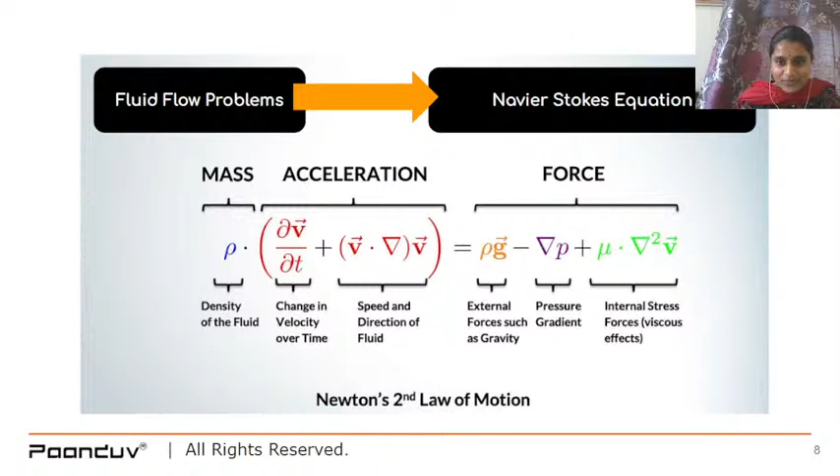Now, I am very sure that this equation is not new to you. Obviously, it's the Navier-Stokes equation. This equation was quite simple to solve until one day Mr. George Stokes decided to add the viscous effects term to it. And since then, this equation has become one of the unsolved math problems of the world.

The basis of CFD is rooted in the Navier-Stokes equation. The solution of this equation requires the simultaneous consideration of mass, momentum as well as energy. Such problems cannot be solved analytically, and that gave birth to computational fluid dynamics.

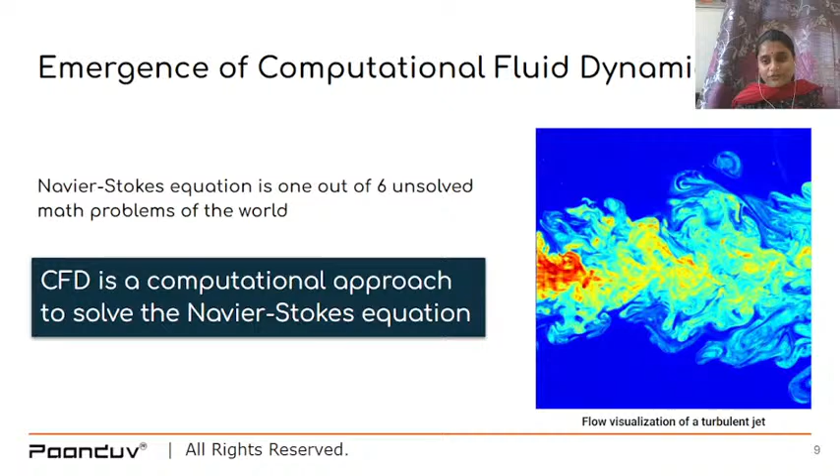Now, what do you imagine when I say CFD or computational fluid dynamics? Do you imagine some colorful images? What you imagine are some imaginary particles moving here and there with very colorful screens in front of you with red, black, white and different colors involved.

But CFD goes way beyond these images. What you see in front of you are not simple images, but these are actually the simulation of data centers which we have just discussed. The black buildings that you can see in front of you are actually massive data centers which we have simulated in our computers.

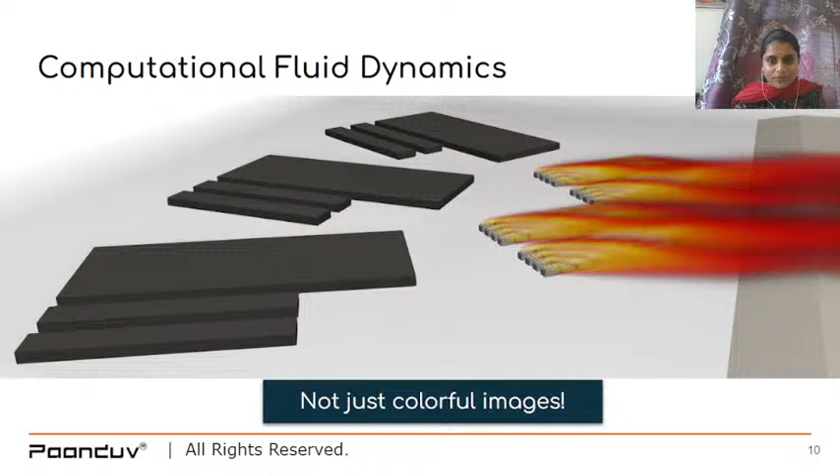So just imagine the capability of CFD and try to see it beyond just the colorful images. What goes beyond CFD is the mathematics, fluid mechanics, physics as well as the numerical analysis.

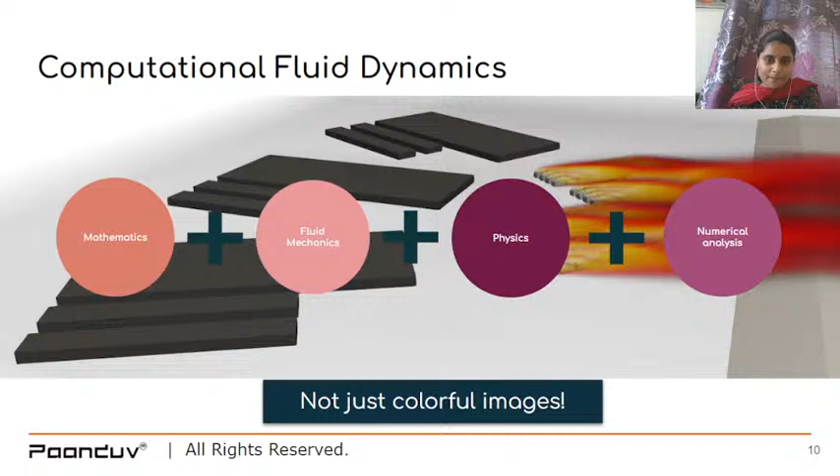Now, since I have given you a fair idea about CFD, let's see the flow of CFD. We can divide the flow of CFD into 3 parts: pre-processing, the solving stage, and then the post-processing stage. Now I'll discuss the pre-processing stage first.

It is the very first stage of CFD simulation which helps you define the parameters of simulation in an accurate way. So what you do is create a mathematical model, and we apply our boundary conditions as well as the different material properties according to our problem.

So to sum up what we do in the pre-processing stage: we upload our geometry, the CAD geometry, we create the simulation domain, we assign the simulation settings like initial and boundary conditions, material as well as physical phenomena, and then we generate the mesh.

So how do we do this? We do this with the help of FreeCAD as well as the Snappy Hex Mesh tool. This is a tool present in OpenFOAM that lets you mesh your geometry.

So at this stage you have to define what your problem is and what needs to be done. You have to apply everything that you need for the problem to be solved.

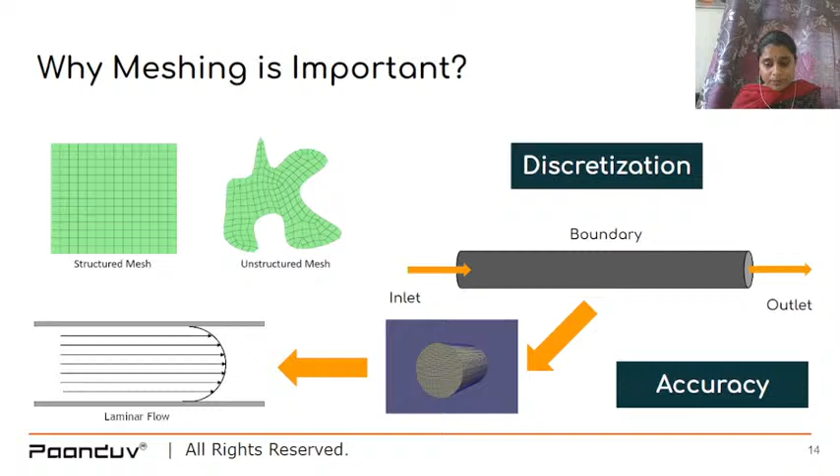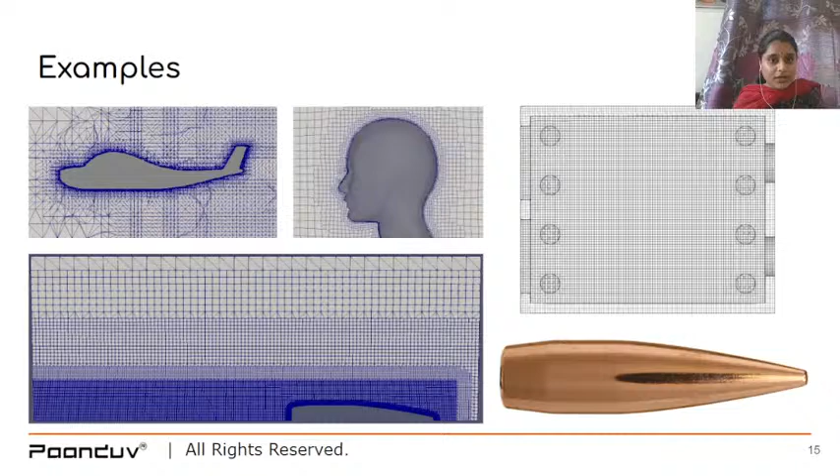Now since I am talking about CFD, you must be wondering how it is going to help us. Obviously the people who are joining us today might be from different backgrounds - these might be from mechanical, chemical, aerospace and all. So you might be wondering how, if we learn CFD, it is going to help us, and what advantages we can avail when we learn CFD and OpenFOAM.

Now if anyone joining us today is from Gujarat or has ever been to Gujarat, they might be aware that Adani has installed wind turbines there, and these wind turbines are even taller than the Statue of Unity. These wind turbines are presently generating 5.2 megawatts of electricity, and this electricity is helping to light up to 4,000 homes. So the nacelle that we have simulated is the heart of the wind turbine - it is where the kinetic energy is converted into mechanical energy that actually produces the electricity. Poonduv Applications has put together a case study of the thermal management of the nacelle, overcoming the geometric complexities.

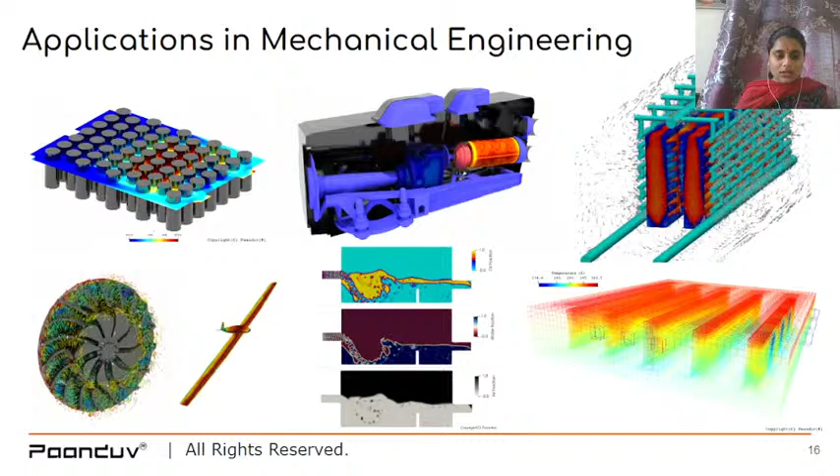Now let's look into the aspect of chemical engineering, how CFD plays an important role in it. Chemical engineering is a major user of CFD. Chemical processes are all about separation, boiling, condensation, and mixing with unit operations. There are large numbers of unit operations or separation technologies where we can use CFD to get better performance of our systems.

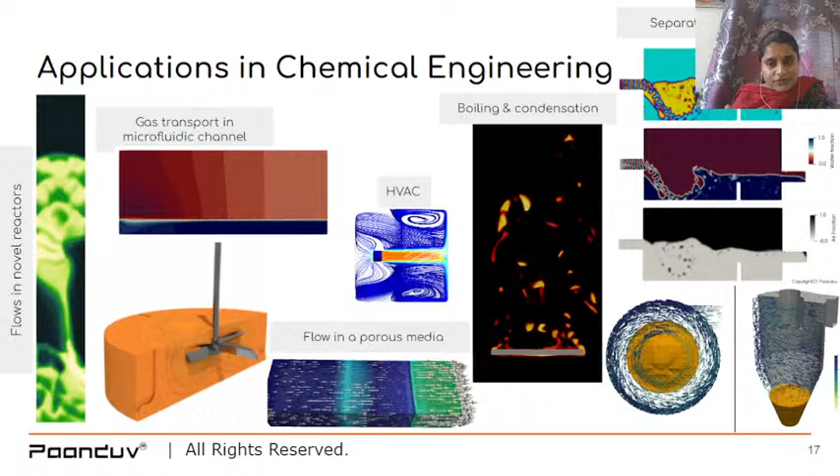Similarly, we can use the benefits of CFD in porous medium boiling and condensation processes, and also for the centrifugal separator, shown on the right, where solid particles are separated from the fluid, which can be a gas or a liquid. We can increase the efficiency of our cyclone, which is intensively used in industries nowadays. Through the use of CFD, we can increase its accuracy and overall efficiency by optimizing the design parameters as well as the velocity.

Now let's move on to the applications of aerospace engineering. It's said that traditionally aerospace engineering is the foremost user of CFD. Recently, the Russian military has said that they have used hypersonic ballistic missiles in the conflict with Ukraine.

So what are these supersonic missiles? These are missiles with a maneuverable warhead traveling at a very high speed, you can say supersonic speed. Through simulations, we try to simulate these supersonic ballistics.

You must also be aware of drones. They are on a boom everywhere. The drone market is expected to reach about 500 billion by 2028, and it is expected to cross a CAGR of 50% by that year. So where does the drone come into play? Drone performance depends upon many factors which require design simulation to evaluate behavior and performance under actual conditions. Through simulation, we can evaluate the flow, structure, and thermal management, as well as the thrust and lift calculations of the drone.

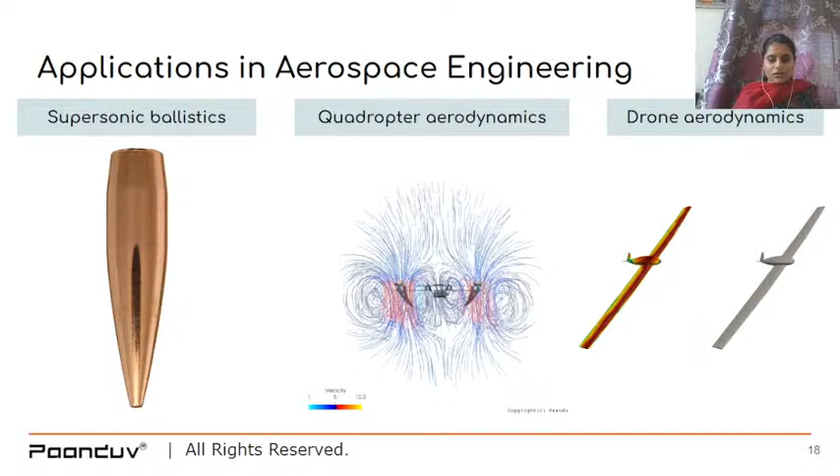Now we will look at the applications of CFD in civil engineering. Here we can use CFD for dam break analysis, tailings, multiple cascading drop shafts, biochemical reactions, and also wastewater treatment.

What is dam break? Routing is used to demonstrate how a reservoir will affect the volume of water downstream under conditions like flood or storm, so that we can reduce or avoid loss of property and human life. Paanduv Applications has modeled the tallest concrete gravity dam in the world, located in Arunachal Pradesh, and demonstrated how the reservoir will affect the volume of water downstream.

Now tailings are the mine waste which contain a lot of effluents and harmful products. We try to navigate the flow to places far from human civilizations. These tailings are non-homogeneous, so many researchers and scientists have suggested that if we dewater these tailings streams, we can produce a homogeneous and non-segregated thickened form. We work at this forefront to prevent catastrophic failure of the geological structure and propose a design to control the dam, reducing mishappenings so that the effect on nature and human life is minimized.

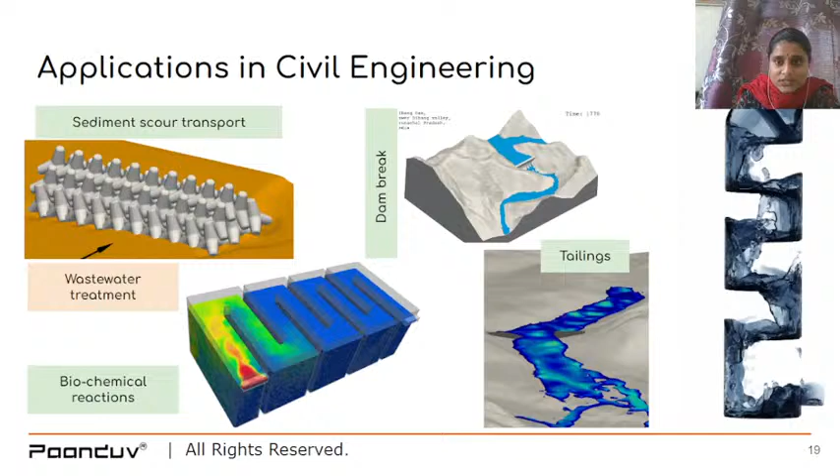Similarly, on the very right hand, you can see the multi-phase cascading drop shaft. The drop shafts are used to reduce the kinetic energy of water so that they can have minimal impact on the underneath structures. So what we do is we try to limit the drop height between the baffles to keep the velocities low. So these are some of the places where CFD is being used extensively by the industries to design the systems, to design new systems, and even to protect human life and civilizations.

Now this brings us to tell you about our module which we have included in our academic program. So PA3P, which is our academic program of Paanduv applications, we have divided our modules into different hours. We have 10 hours, 20 hours as well as 30 hours modules. You have the choice of selecting any of the modules according to your needs, but in each of the modules we try to cover all the aspects of the flow of CFD. We try to cover the pre-processing, the solving as well as the post-processing in all of these modules. It's just we dive deeper when you go for the 30 hours module, so we'll give you more insight into what goes beyond the solving.

So in a 10 hours module, we help you in installing the operating system. We give you details about the meshing, the structured, unstructured, graded as well as the mesh refinement. We have divided the 10 hours and 20 hours into different days. So every day we take a 4 to 5 hour workshop. In day 2 of the 10 hours, we cover the CAD geometry as well as the advanced post processing.

Now, if you go for the 20 hours module, along with the CFD theory and scientific computing, we also give you an industrial case study where you have an insight of the actual processes that go on in the industry. I've already told you that we have a team who are extensively working with organizations to help them include computational fluid dynamics into the system. These are the people who are actually going to educate you. They have real time experience of how the industries work, and through their experience they try to pass on that knowledge to you, so you can be industry ready.

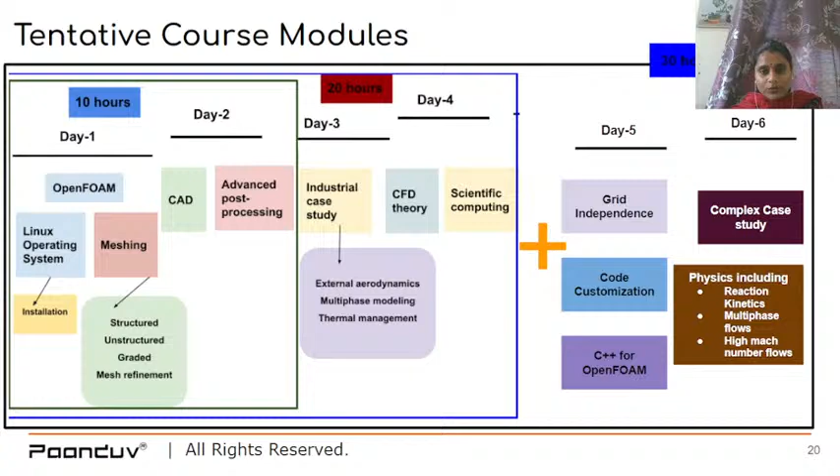The industrial case studies that we try to cover in our academic program are external aerodynamics, multi-phase modeling as well as thermal management. External aerodynamics is what the drone is, and I have already told you the numbers on how the drone industry is booming. Similarly for thermal management, EVs are on a boom these days. It's a buzzword because it is saving the climate, so a lot of industries are relying on the thermal management of EVs. So we give you a case study and we assist you in solving these case studies so that you can have a fair idea of how organizations using CFD try to solve today's real life problems.

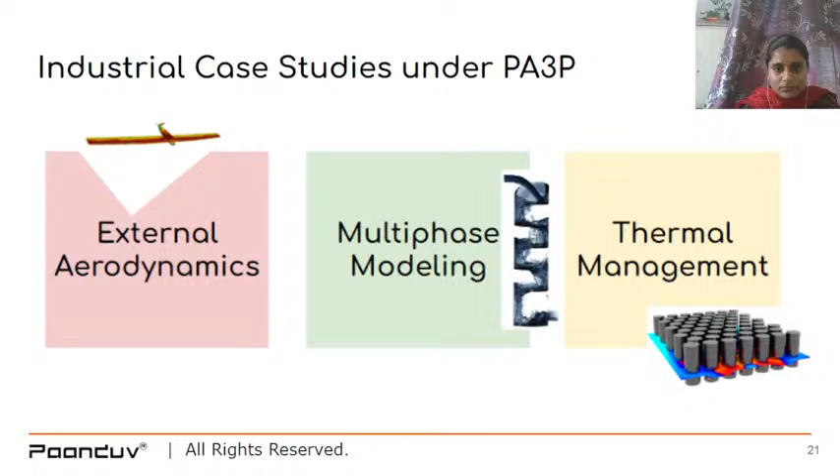Since we are talking about CFD, it's very important to talk in terms of the market that we are going to see in the coming few years till 2025. The CFD market is expected to grow at a rate of 5.33%. The incremental growth is about $606.76 million. And the growth contributed by Europe itself is about 37% of the growth of CFD markets. Here we are only talking about the high revenue countries or continents.

There are smaller continents who are extensively working on CFD in OpenFOAM, and they are trying to solve real time problems today. Now CFD has become an integral part of any industry. Core R&D teams are relying extensively on CFD to solve their problems. Batteries, EVs, drone systems, all these industries that are on a boom use CFD to solve their problems. And a lot of people are heavily relying on open source in comparison to commercial software. The reasons have already been explained: these are low cost, they give you accessibility, and they give you the advantage to customize the code according to your needs and your problem. Even though there are more than 100 solvers present in OpenFOAM, you can still customize the code and solve your problems.

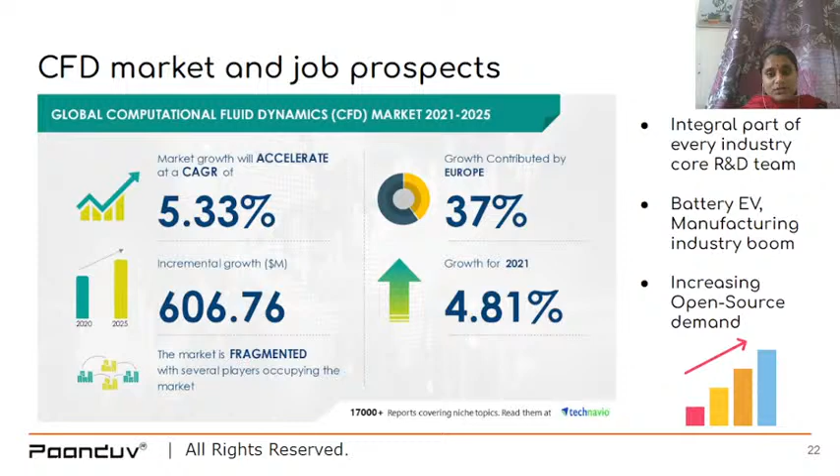So now let me give you a fair idea of why we want you to choose us. We have an industry-ready program. Once you choose us and the programs that we have designed for you, it gives you a competitive edge over the others, right? Once you have gone through our program, you have a fair understanding of CFD, OpenFOAM and everything: the pre-processing, the solving stage as well as the post-processing stage. Your resumes are not going directly into the spam folders of the recruiters. They are definitely going to be selected.

We have passionate and experienced trainers with us. These are trainers who are presently working with industries, solving their problems, giving them consultations. So they have an idea of how the industries are working and what problems the industries are facing, and with that experience, they pass on that knowledge to you. We already have stellar stories where we have organized the programs and the people are really happy with the knowledge that they have gained once they have enrolled in our programs.

Our programs are not only national, but we have gone international. At present we have conducted our workshops in more than 2 to 3 international organizations. We don't just talk about the theory, we do the practical and we apply the concepts practically. And most importantly, we are using a sustainable as well as a comprehensive CFD simulation.